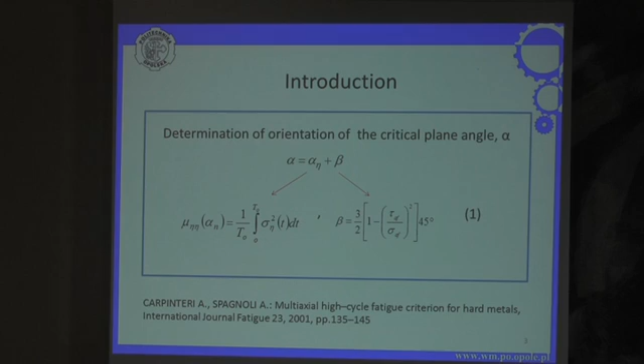And here we have the special angle proposed by the Italian group. So it is from 1, as Andrea told, for cast irons, up to square root of 3 if it is the Huber-Mises-Hencky equation. So the angle beta will be from 0 up to 45 degrees.

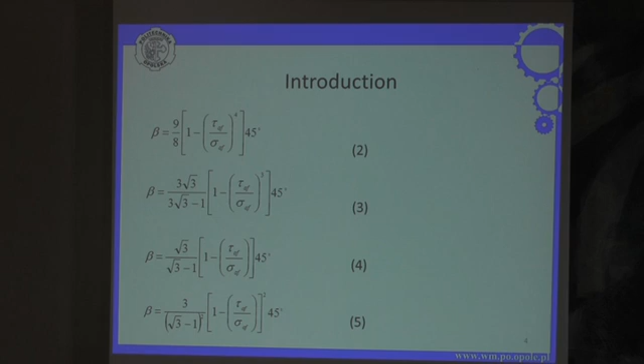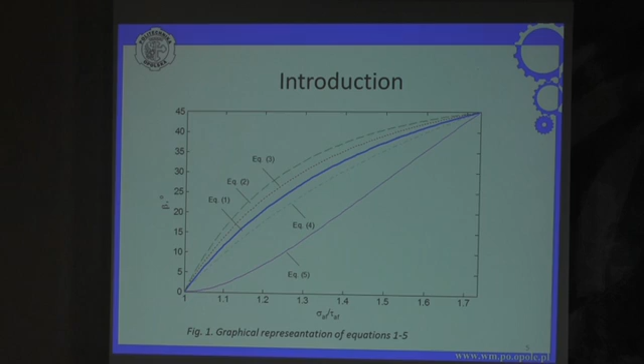At a conference in Kyoto, organized by Professor Sakane, we said there are many possibilities to define this angle beta. We checked these 4. So if you have from 1 up to the square root of 3, this is the equation proposed by the Italian group. So we thought there are also other possibilities, because this first equation is an empirical equation. There isn't any physics in this equation.

So how do we calculate fatigue strength? At the beginning, we have the history of normal stress, which we obtain from bending, and the history of shear stress, obtained from torsion. Next, with determination of the orientation of the critical plane angle, separately for every material, we need the Wöhler or Basquin curve for pure bending and pure torsion.

So, the calculation of equivalent stress in proportional cyclic loading, because at the beginning we want to prepare equations for cyclic loading. It is the equivalent stress amplitude. It will be the sum of shear and normal stress with coefficients. It is connected with the idea of Professor Macha. He was my boss, as you know.

So, from pure bending and pure torsion, we may calculate the coefficients B and K, where this is the fatigue limit for bending divided by torsion. And at the end, from the Wöhler curve for pure bending, we obtain the number of cycles.

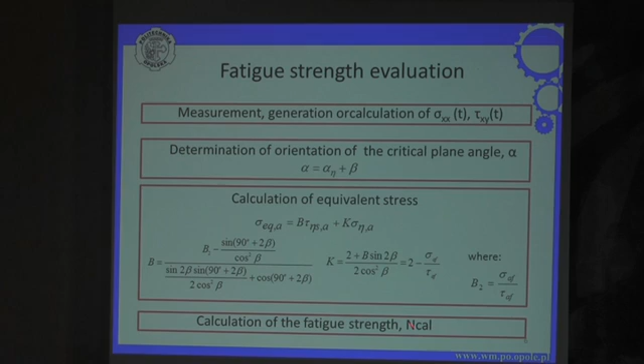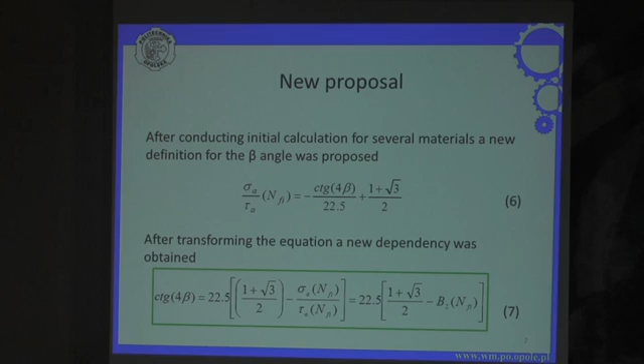And we decided that this idea of the Italian group is correct, but we must find the equation which will be correct, because I'm not sure that this proposed one is the best. After calculation and thinking, there's no mathematics for how we found it, but we propose such a connection. Here is the fatigue limit for bending divided by torsion, and here is angle beta from 0 up to 45, as it was.

The proposal of the Carpinteri group is this green line from 1 up to square root of 3. We see that here should be cast irons, and mild materials should be here. But we think, why will the maximum be the square root of 3? This is Huber-Mises, we know. But sometimes maybe Tresca will be correct. If Tresca, it will be 2. For example, we see 10HNAP steel is more than square root of 3. It's between square root of 3 and 2.

And here we put many materials. Some materials are from my group, some are German, French, and others from literature. And we see these points. So we see that these points do not correlate with this green line. Maybe this blue line, our proposal, will be better.

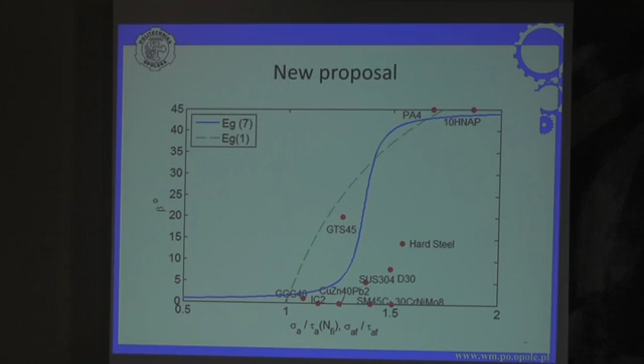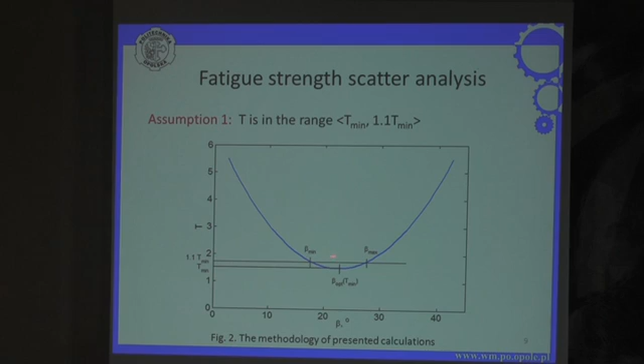But we know that fatigue of materials is a statistical problem. So for the combination of bending and torsion for a material, for every beta angle we calculated the lifetime, and here is the scatter. When the scatter is the minimum, this is the optimization of angle beta. But as I said, it's statistical, and we decided that the range is T minimum up to 1.1. So the angle beta is from beta minimum up to beta maximum.

So for example, for this GTS 45 material, we obtain beta where the scatter band is minimum, beta is 20. But we see that the scatter band for a large regime is very flat. In practice, it's flat. So in practice, it is possible from 8 up to 45 for this material.

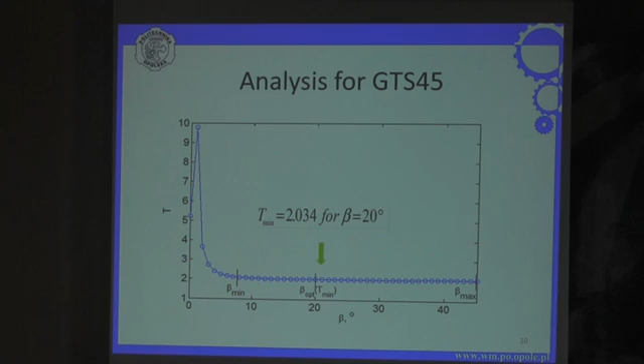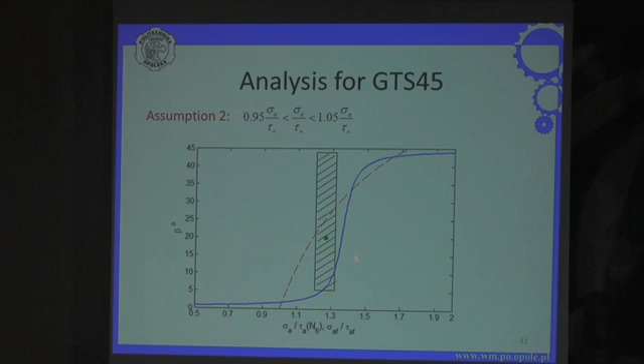And the same, we obtain Wöhler curves for bending and torsion, and we obtain sigma AF divided by tau AF. But in practice, it's not a line. There is some scatter. We decided this scatter is minus 5% to plus 5%. So for this material, this point is the best possibility, but the range of scatter is this. So we will see that the Italian proposal and our proposal within this scatter are connected with these two lines.

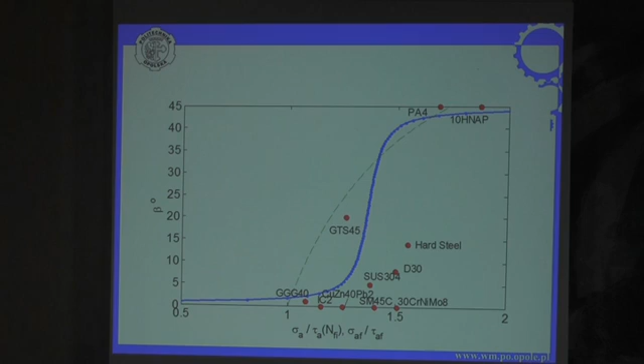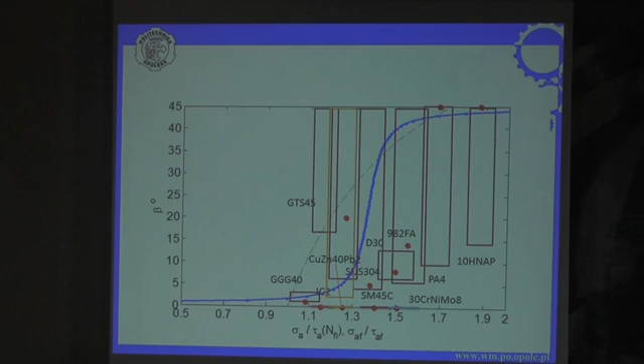So I come back to the first figures. So we put the scatter for some materials. You see, first, second, next, this material doesn't correlate. It's the Ishihara Kawamoto material. Our aluminum alloy, next, doesn't correlate. This is very good. Doesn't correlate. So we have the scatters. We see that for some materials, the scatter is very flat. For example, you see this yellow, it is copper. In practice, every place is possible.

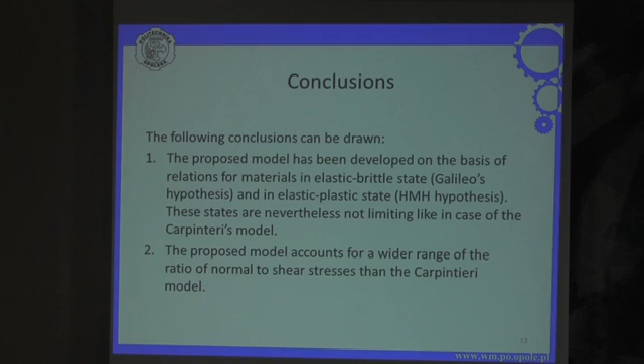So, at the end, the following conclusions can be drawn. The proposed model has been developed on the basis of the relation of material in the elastic brittle state, Galileo's hypothesis, and in the elastoplastic state, the Huber-Mises-Hencky hypothesis. These states are nevertheless not limited, like in the case of the Carpinteri model. The proposed model accounts for a wider range of the ratio of normal to shear stresses than the Carpinteri model.

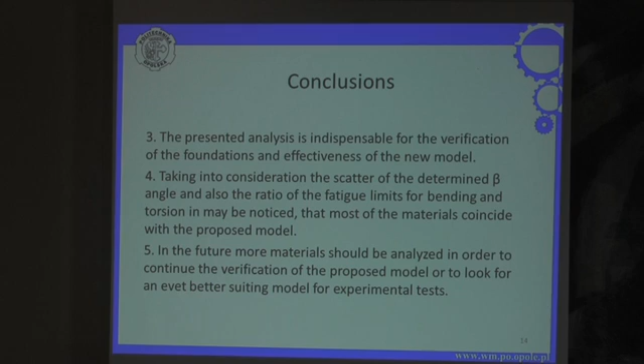The presented analysis is a step in the verification of the effectiveness of the new model, taking into consideration the scatter of the determined beta angle and also the ratio of the fatigue limits for bending and torsion. It may be noted that most materials coincide with the proposed model. In the future, more materials should be analyzed in order to continue the verification of the proposed model or to look for an even better suited model for experimental tests. Marta Kurek started work on more materials, because now we have 10, we must find more materials.